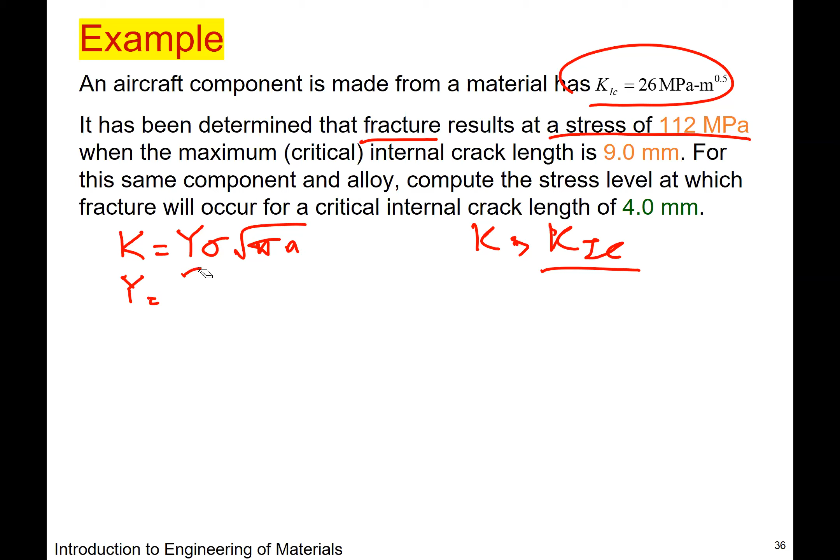So we can rearrange this equation to get Y. We know fast fracture occurs when the stress intensity factor is greater than K1C. So I've rearranged the equation to compute the geometric factor. Y equals K1C, which is 26 MPa, divided by the applied stress, which is 112, times the square root of pi times the internal crack length of 9.0 millimeters -- that's 9 times 10 to the negative 3 meters, divided by 2, because it's an internal crack. Computing that, we get Y of 1.95. That's the geometric factor for this internal crack.

Now, for the same component and alloy, we're asked: now that we know the geometric factor, compute the stress level at which fracture will occur for a critical internal crack length of 4 millimeters. Again, since it's an internal crack length, we divide the crack length A by 2. So now we need to figure out the stress level for this critical crack length: K1C divided by Y, where K1C is 26 MPa root meters, Y is the geometric factor we found, times pi times the new crack length of 4 times 10 to the negative 3 divided by 2 meters. That gives us the stress at which fracture will occur for this critical internal crack length of 4 millimeters: 168 megapascals.

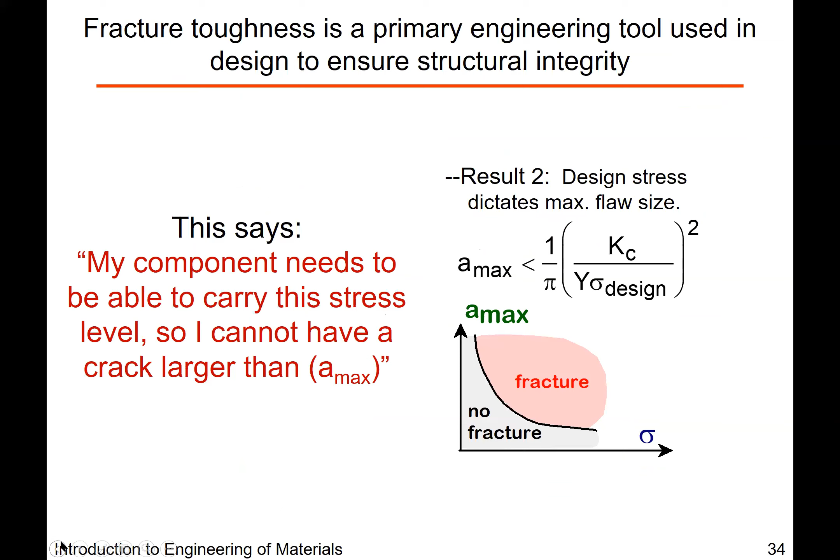What is the square root term in the numerator? Oh, that's the unit. Why do we substitute K1C for K? K is the stress intensity factor. Why do we substitute the plane strain fracture toughness for that? We know that the stress intensity factor can be computed based on the applied stress and the critical crack length. If it's greater than that, then the crack is not stable and fast fracture will happen. So that's what this question is asking: when does this occur? We can say that if we know what the fracture toughness is, when it's right at that critical crack length, then fast fracture will happen.

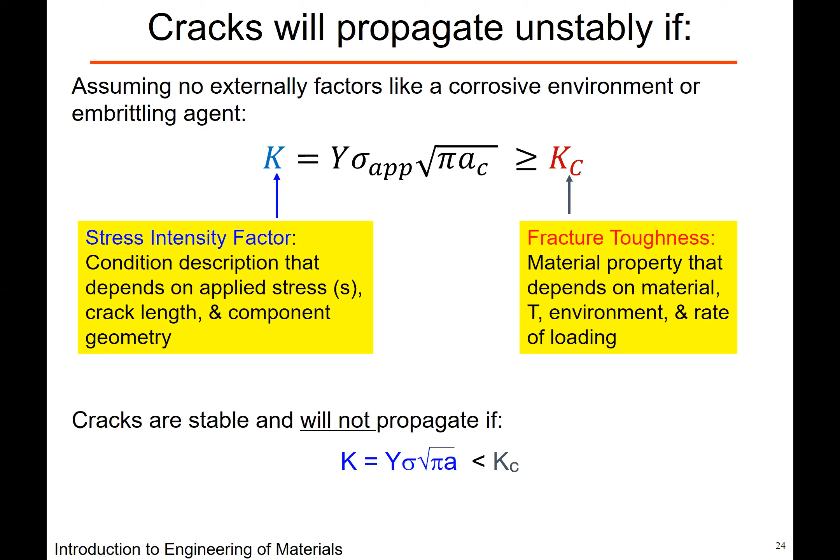Will content from the guest speaker lecture be on the final exam? Well, does that dictate if you're going to show up?

Given that, yes, it's on your syllabus, because the guest lecturer will be lecturing on content that has already been dictated and will be covered. So instead of my giving the lecture for that module, the guest lecturer will be giving that content. We've coordinated so the guest lecturer knows what should be covered. But the whole point of having a guest lecturer is that this person should add something beyond just the content you could read from a book, right?

Professor Glenn Bain has had 30 plus years in material science and engineering in academia, but he's also worked with a number of industry partners. He still works with them, and he's really been a leader in manufacturing. He'll speak to his collaborations with a number of automotive collaborators where they tackled materials design concepts based on the fundamentals you've learned here and maybe in some of your other classes. Who better to speak about the societal and environmental impact than someone who's been in this area for a really long time and can speak to the progression and evolution of how we do material science and engineering. So fundamentally still rigorous, but this person adds many years of experience.

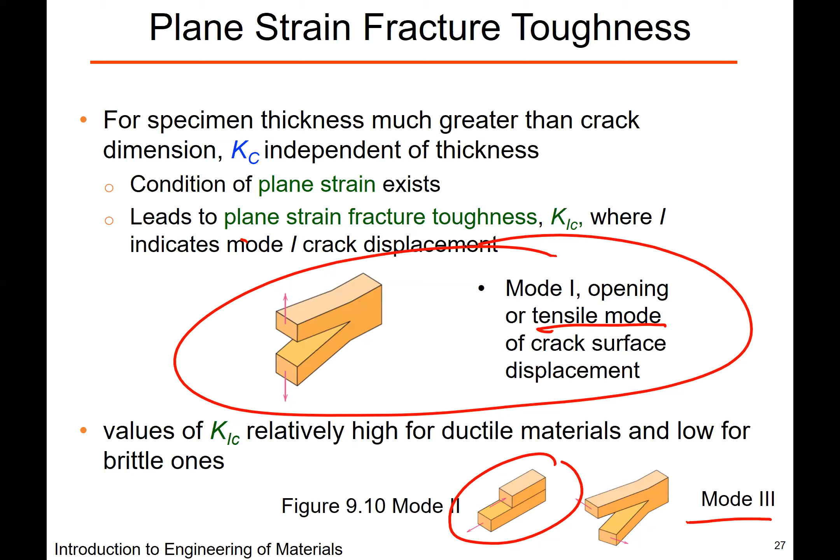So we are not concerned about mode 2 or 3 for this class. That is correct. All the examples have been on K1C, so we're ignoring 2 and 3 for this class. That means it won't be on an exam. I hope that is very clear and alleviates some stress and concern about that.

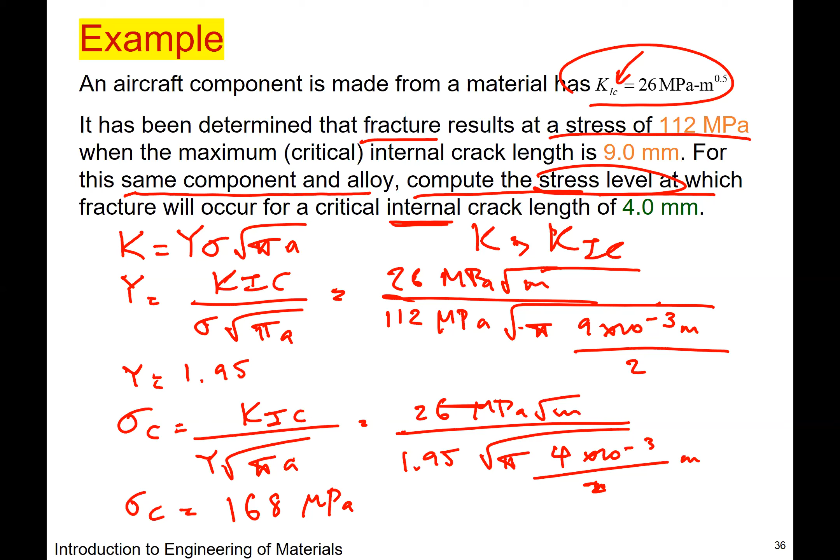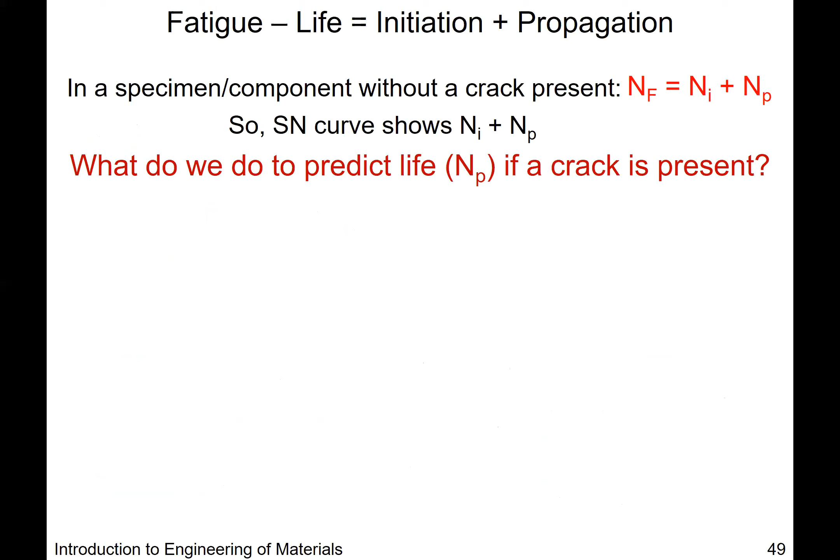So where we left off was on fatigue, actually. I skipped by this slide, mainly because there was a lot to talk about and not enough time last time before being interrupted midway through this thought.

When we were talking about fatigue life and how crack propagation happens, when you form a crack and it gets bigger and bigger, it's actually not a linear rate. Well, that depends - here it is linear, but in the beginning, if you look at the crack and fatigue life, dA over dN, the corrosion and fatigue folks know this inside out. There are three regions once you have initiation of crack formation and then propagation. We talked about the three regimes or stages in which this can happen. The takeaway message is this should be a huge concern for you as it gets near the fracture point - the crack propagation accelerates, and you can see the crack rate formation, dA over dN, versus the number of cycles accelerates quite a bit.

It's a real concern if you initially have a crack. We said before, cracks can be stable if they're of a certain size and you apply a certain load and it won't propagate, right? It's nowhere near the fracture toughness point, so it's fine - it's going to be stable. The material can still be used in service. It's fine. The story changes quite a bit.

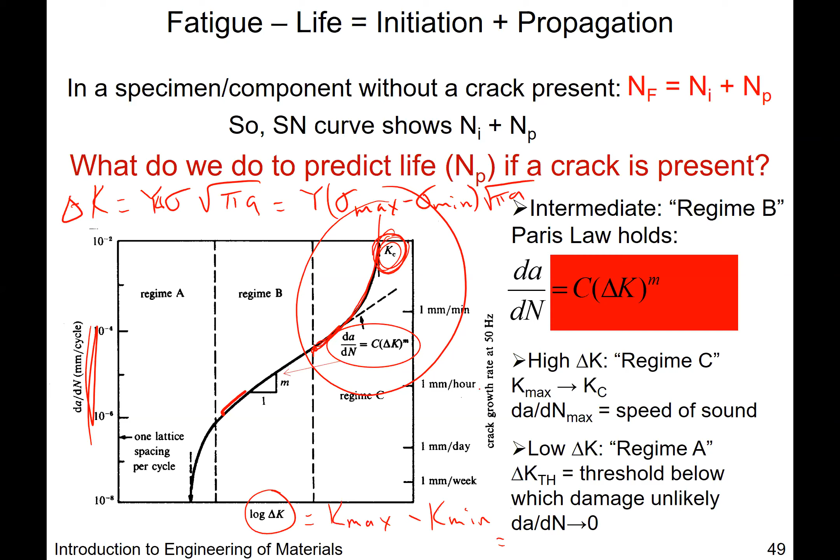Once you get into the real world and you are actually engineering materials where lives are at stake, this is something you really need to predict well and do safely. One of the other things I did not mention due to time is that when we're looking at fatigue life and fatigue life testing.

We're looking at the stress amplitude versus number of cycles to failure, so SN curves. When we talked about this, what I didn't talk about is the spread in the data. So when we're measuring the stress amplitude as a function of N, the cycles to failure, the data points spread out.

It means that if you have some high stress amplitude, the number of cycles to failure, you can compute more precisely. As N increases, since your error bar is larger, you cannot really say as definitively if it's going to fail after this number of cycles.

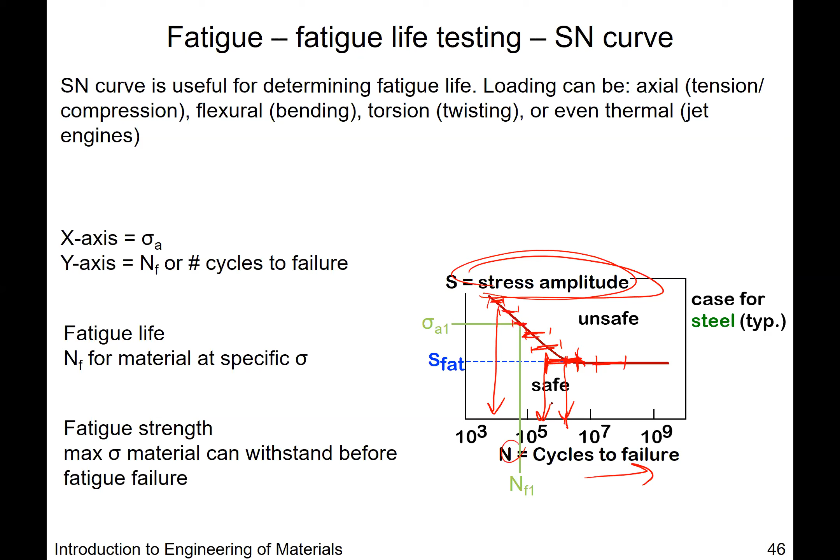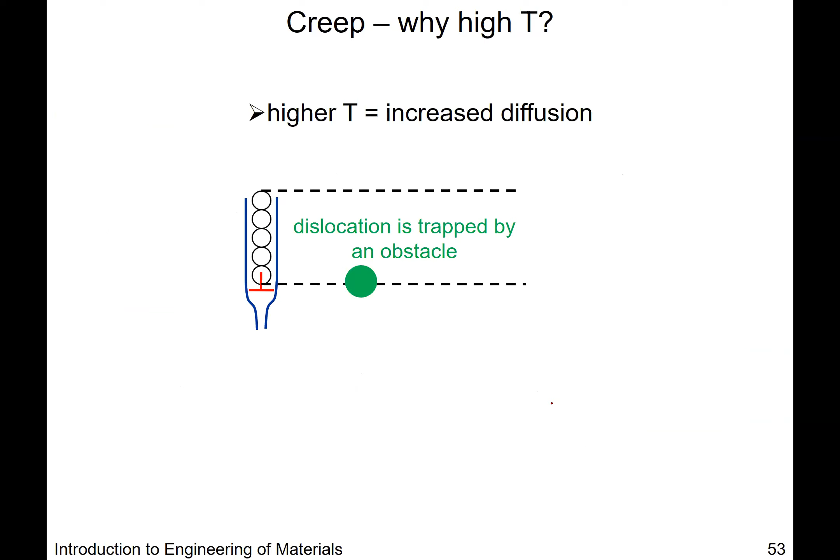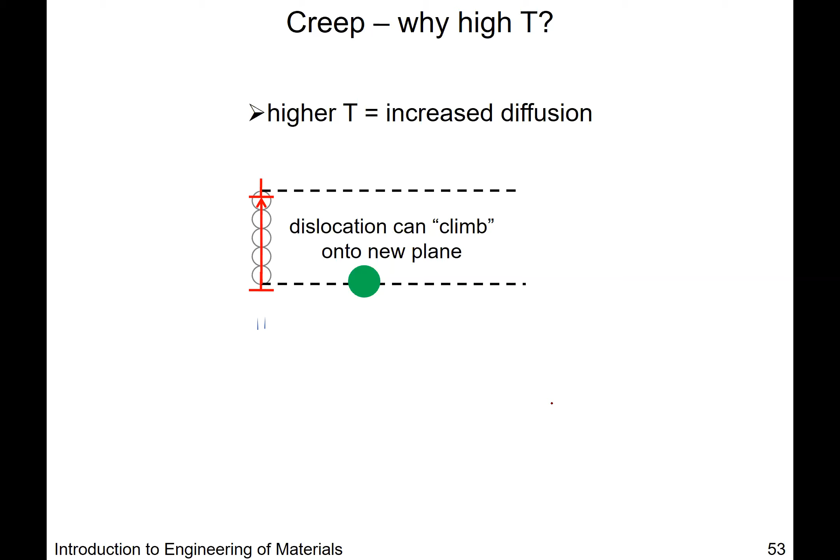Okay, so let's talk about creep. We talked about that. This is just a review on dislocation and how dislocation can travel and climb to different parts of the material.

I just wanted to wrap up creep with talking about safety prediction. So when we talk about a static applied load at elevated temperatures for some period of time T, we really want to know when is it safe, when is it not safe. That's ultimately the question we want to answer at the end of the day.

And creep is an Arrhenius type of process. As you recall, we've come across quite a number of these thermally activated processes, such as vacancy formation, excitation of electrons, for a number of systems. And so creep is no different.

So the strain rate, epsilon dot, is dependent and thermally activated. At 40% of the melting temperature or higher, you can imagine that creep can happen quite readily, and the strain rate increases as a function of temperature, as you increase your temperature.

And so what people have done is they've used this Larson-Miller parameter that takes into account all of these conditions: time to failure, what temperature you're at, the applied load, and so that's also assumed in this Larson parameter. When you recall, when we were calculating how many vacancies can form.

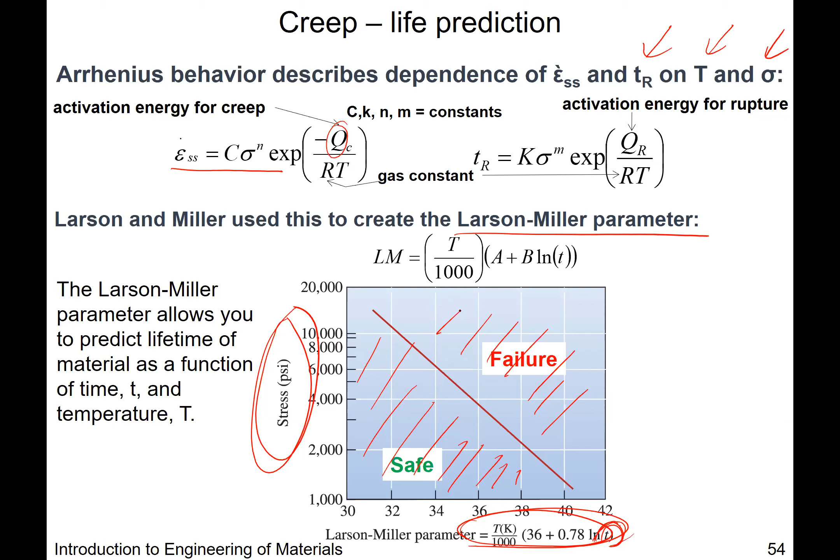Okay, so let's review before we move on to corrosion. So what is going to cause failure? When is a component going to most likely experience failure?

Well, you need to know the stress level, you need to know the fluctuation max min if it's cyclical, and also stress concentration due to the design or the flaws in your material. Of course, all materials have flaws. It's just how do we design a component in a way that we can still operate safely even when we have those flaws at a certain temperature.

So when we're thinking about fracture, we're taking into account the crack length and also when it grows. So is the applied load less than the tensile strength for ductile material? Is it lower than the yield strength for brittle materials, right?

And so there we talked about the fracture toughness, fatigue, cyclic crack growth. So when we apply a max and a min, in tension and in compression, how does that affect the number of cycles to failure, NF? How does that affect the crack propagation? Which stage is it in?

And then we also talked about creep where we applied a static load, but then we hold it over time. And so there we need to know some activation energy and also this materials dependent parameter. This obviously we won't be focusing on too much, but I thought I included in the summary for completeness. So are there any questions before I proceed on to corrosion?

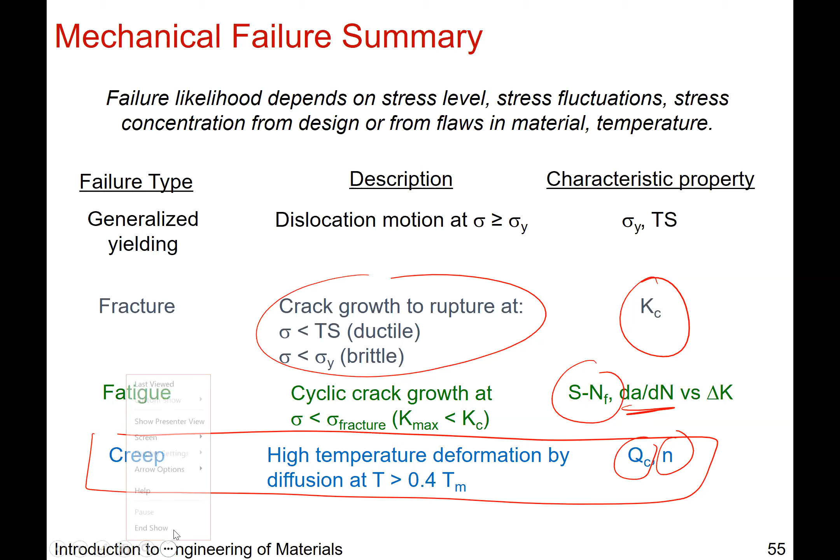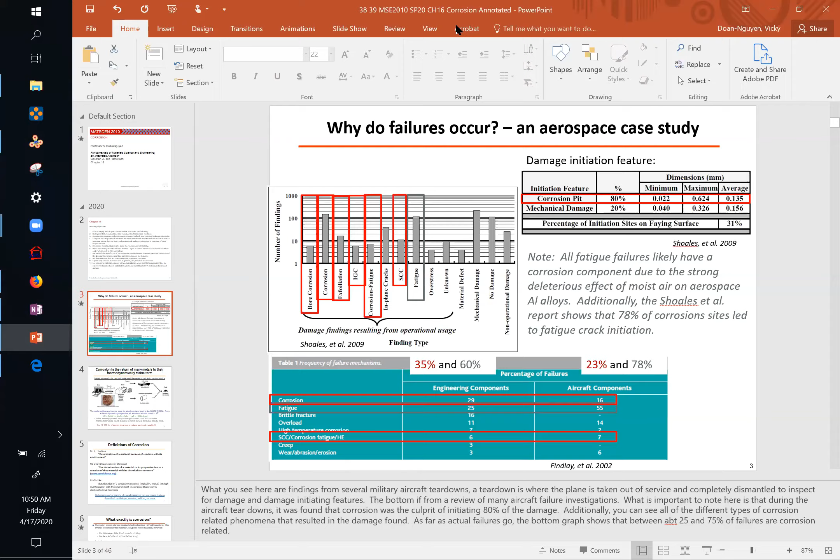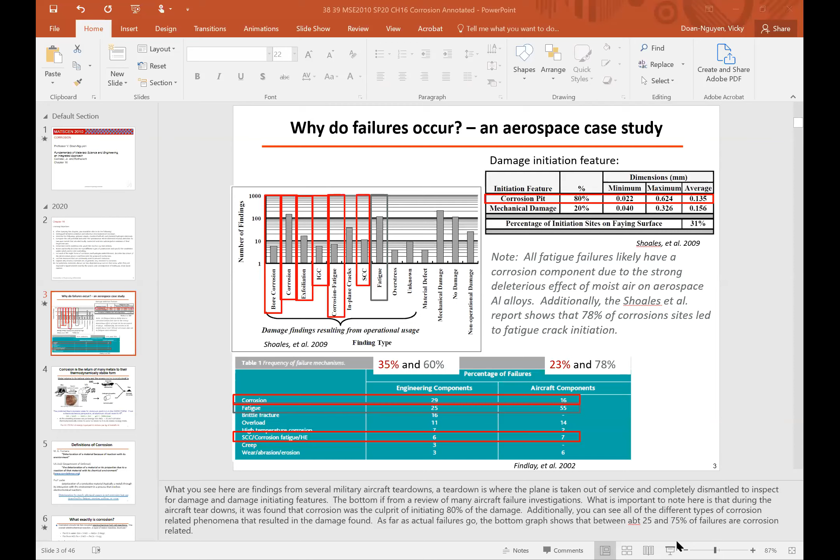Interesting. Let me exit out real fast. All right. Fascinating. Okay. Well, one moment, folks, while I figure out why this has decided to cut off parts of the screen. Let me stop sharing and reshare again. Okay, that's much better. Let me switch over to this side because the camera is being wonky.

That's okay. All right, so slightly different angle, but the video will continue. Okay. Right, so corrosion, the last module from me. There we go, this is better. Okay. Sorry, everybody. Right, so the last module from me. We're going to bring it all home and talk about how corrosion ties into failure analysis and fatigue.

So after this chapter, you'll be able to master some key terminologies, which is oxidation and reduction. You may have heard this already in your general chemistry course. So we'll review what reduction and oxidation means in electrochemical reactions. We'll also talk about galvanic couple, standard half cell, the standard hydrogen electrode. We'll talk about cell potentials and also what happens when you have two pure metals in solution together. And then we'll also talk about the rates at which oxidation and reduction happens.

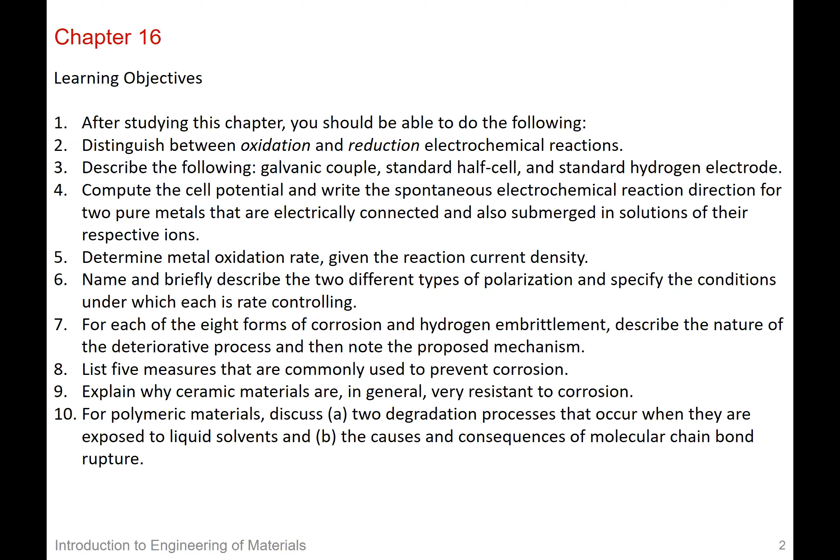We'll also talk about corrosion in the sense of environmental assisted corrosion. So what happens when your material is in some corrosive environment, like in acid, HCl, or in seawater, things like that. All right, and we'll also talk about polymeric corrosion, although that's not really a thing in the sense that you need movement of electrons, and so polymers can degrade, but in terms of the definition of corrosion and how you need to move electrons around, that's more prevalent, obviously, in metals, right? But you can have degradation in polymers. And there is some wear, even though polymers are more corrosion resistant.

Okay, so why do we even care about corrosion? You can imagine that it's a huge billion-dollar industry to prevent corrosion. And you can see this especially in Ohio, where we have winters, right? We have to salt our driveway, we have to salt the street, and that could assist with corrosion of metal parts in your vehicle. It can also cause major issues in aircraft.

And so here on this slide, you see data tables that talk about how failure has happened in planes, right? So this comes from a decade study from Shoales and coworkers. This is 2009. That means 10 years before that, they've looked at airplane parts and also aerospace components, and they looked at what was the original reason for failure in a material, and you can see here they've summarized it as 80% of the initiation feature was due to corrosion pitting.

Okay, and so we'll talk about what is that versus like uniform corrosion. But it's a huge problem. So if you understand corrosion, you can prevent potentially or catch these issues before they happen.

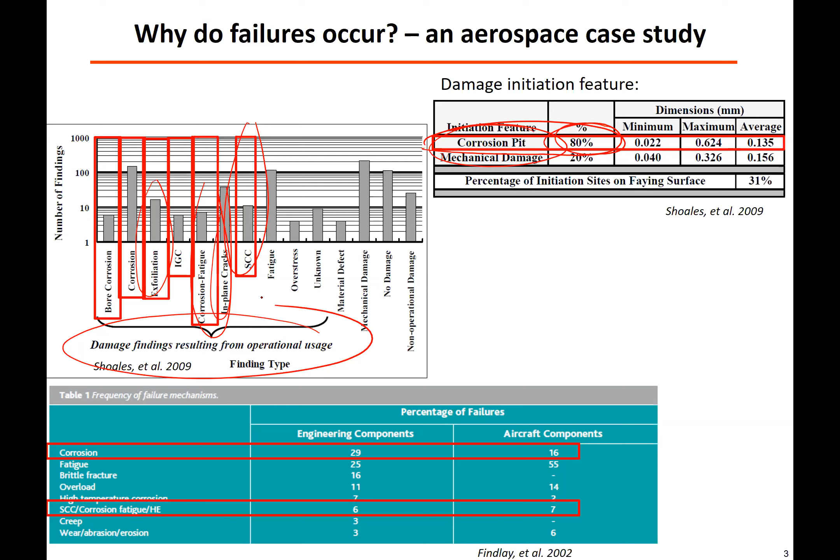So what we're really talking about when we talk about corrosion is we need to break it down into both the thermodynamic part and the kinetics part. When you have a metal and you're mining it out of the ground, you're most likely not going to find a piece of aluminum, a sheet of aluminum foil, or a huge piece of iron. Usually it's in an oxide form, which metallurgically you need to convert. So let's say from iron oxide, through refining, casting, rolling, shaping, all of that, you get out the parts you want in metallic form.

Same thing for aluminum - typically you find it as aluminum oxide. Lithium in lithium ion batteries, you don't just find lithium in ores, you find it typically as lithium hydroxide or lithium carbonate, and then you have to convert that into a metal. So when you buy lithium metal chips or lithium foil from the vendor, it has been converted from the ore. So all that means is we're fighting against thermodynamics.

Typically, when you use aluminum like this, it really wants to oxidize. If you look at the Gibbs free energy, which we talked about when we discussed imperfections, delta G equals delta H minus T delta S. So there's an entropy term and an enthalpic term. The takeaway is, if the Gibbs free energy is negative, that's telling us it's most likely going to happen.

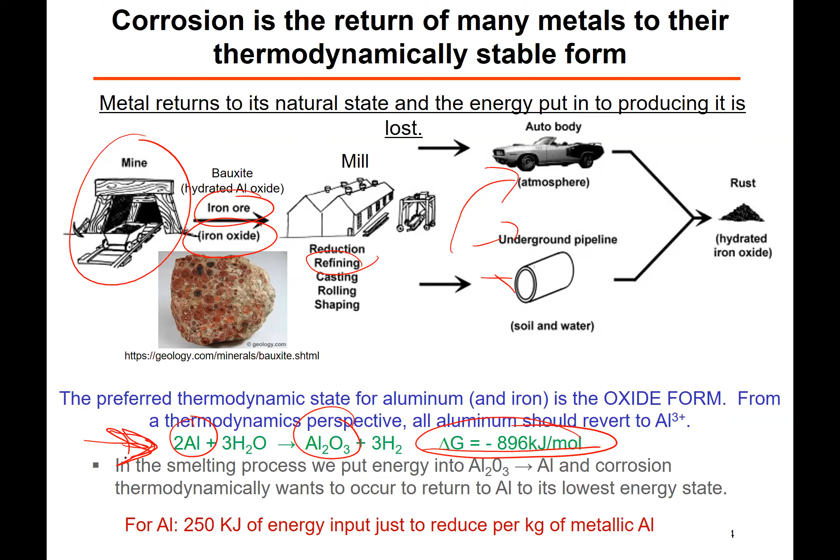But on top of that, now you have to consider fighting corrosion in the Ohio winters. All right, so let's also define what corrosion is. Before, I was starting to go into the details of what corrosion is. Polymers don't undergo corrosion if they're not transporting electrons.

If you've taken the new bus shuttle within the last year or so, one of the stops is Fontana Labs, named after Mars Fontana. Mars Fontana did decades worth of fundamental research on corrosion, and he has defined it as deterioration of a material because of reaction with its environment.

Then the Department of Defense, the Undersecretary of Defense, has defined corrosion as the deterioration of a material or its properties due to a reaction of that material with its chemical environment. Now we're talking about not just deterioration - because you can have deterioration, but what kind of environment? Are you just applying pressure? What is it? So now there's an extension - we have to take into account the chemical environment. Is it an acid? How corrosive, how acidic is this environment, that sort of thing.

And then of course, there are other professors at Ohio State Materials, such as Professor Gary Frankel. Here I've taken an excerpt from Professor Locke, where she describes corrosion as deterioration of a conductive material, typically a metal, through its interaction with the environment - keeping with the defense definition - in a process that involves electrochemical reactions. So by this definition, polymers would not corrode because they wouldn't undergo these electrochemical reactions, and they're not conductive.

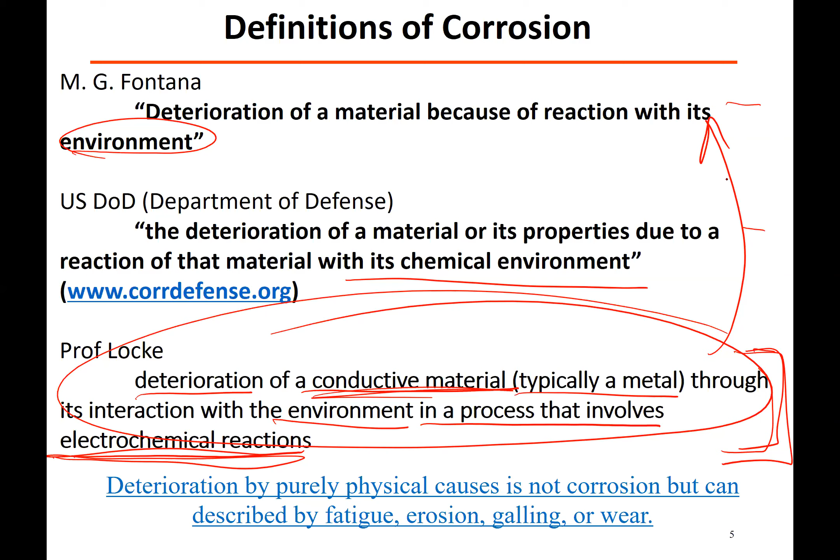So what are the mechanisms involved in corrosion? Corrosion occurs via two coupled electrochemical half reactions. How are they coupled? They have to be coupled electronically - there has to be a pathway for the electrons to travel - and they also have to be coupled ionically, meaning they have to be in the same solution. They can't be isolated from one another.

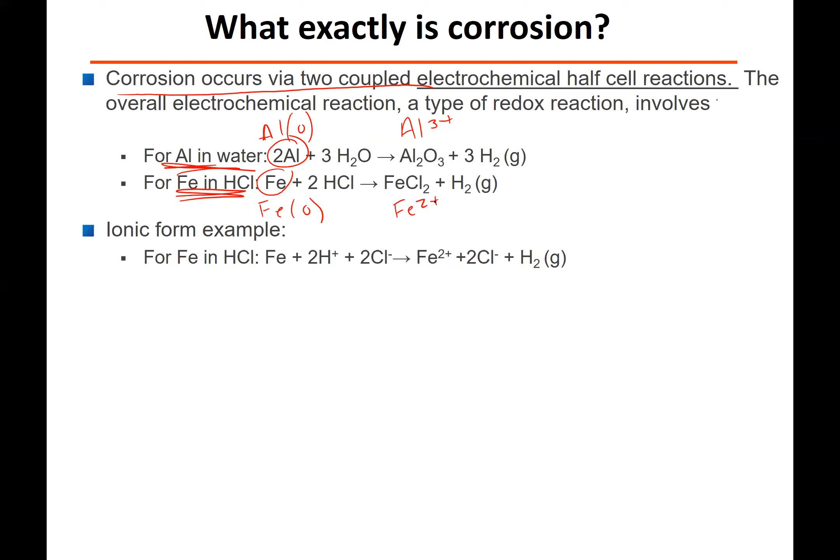A typical electrochemical reaction is a type of redox, reduction-oxidation reaction, that involves, for example, these two reactions: aluminum in water, and iron in acid. The aluminum here becomes oxidized, so that's the anodic reaction. Here's another example where iron goes from iron 0 - the metal is always 0 valent, it doesn't have an oxidation state - to aluminum 3+, or iron 2+ in this case, because chloride is 1-, so Cl2 makes it 2-, and so iron is 2+.

What you see here is there's an evolution of hydrogen. So what's happening is hydrogen in H2O is plus, and that's going to H, 0 valent hydrogen in H2. So really what's happening when we write this out is that iron plus 2H plus 2Cl- goes to this - if we had to write out the ionic form of all the charges and oxidation states, this is what it would look like. But obviously, what we really write is this final equation.

Going back to these two examples, we define the anodic reaction where oxidation is happening: iron going from 0 to 2+, aluminum going from 0 to 3+. Then the cathodic reaction is where you have the reduction of H+ with 1 electron going to H0.

So if we have this overall reaction, the anodic reaction is just Al going to Al3+, very similar. This would be the anodic reaction: Al going to Al3+ plus 3 electrons, because what you need is charge balance. Where do these 3 electrons go? Let's put them here for now. So, very similar to before, instead of 2+ you now have 3+.

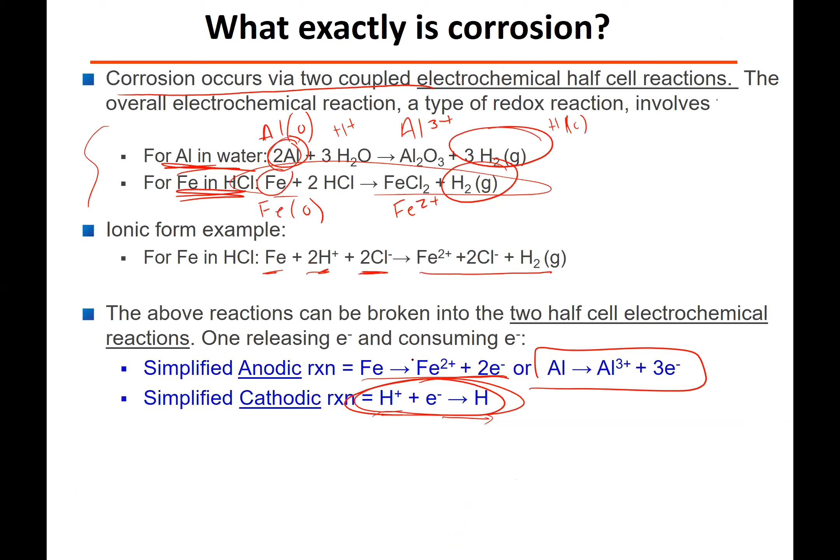So then what's really happening at this interface? Let's say here you have this metal, the electron conductor, sitting in some electrolyte - in this example, it's just sitting in H2O. How we treat this molecule is actually as H+ and OH-. So what's happening during the electrochemical reduction-oxidation is aluminum becomes Al3+, and that Al3+ is then going into the electrolyte. The electrolyte is typically some salt in a solvent, but here we don't have any salt, we just have water as the solvent.

What's happening here is when that happens, the H pluses end up interacting - they're everywhere in the electrolyte, but the ones at the interface will see other H pluses and react to form H2, which will evolve as a gas. And the Al3+ goes into solution - it actually dissolves, this ion dissolves in the electrolyte. So that's one part.

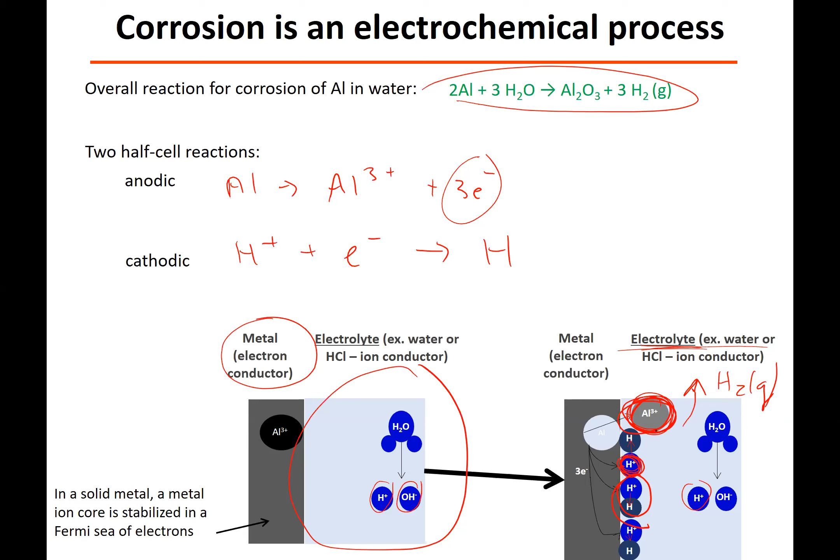What happens when you have two dissimilar materials, let's say iron and aluminum, or aluminum and magnesium? Then you have two pieces of metal and they have to be connected electrically. There needs to be a conductive pathway between the two of them, and the ions have to flow, as I mentioned. So the electrolyte needs to allow for ion flow. If those four things are met, then you can have a corrosion cell.

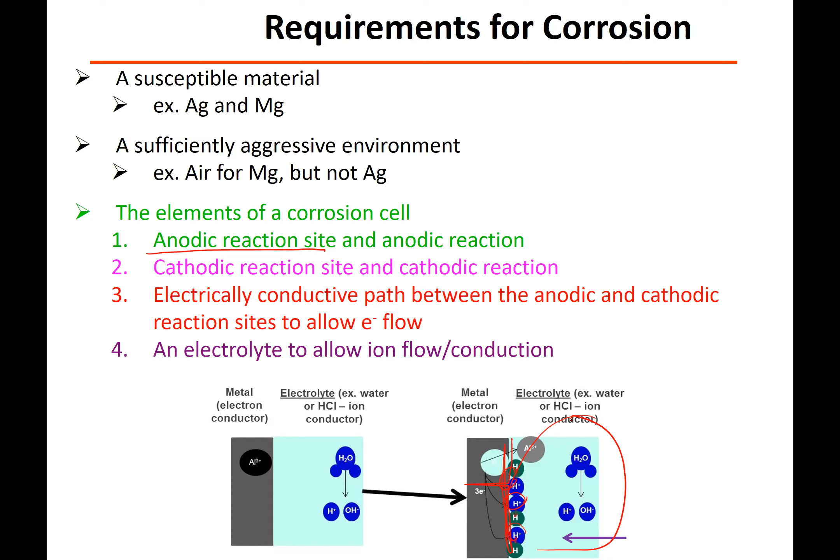So what causes corrosion? Well, real materials cause corrosion by the sheer fact that they're imperfect. All materials are going to be imperfect in some way. Even when you make the most beautiful single crystal silicon, out of the Czochralski method, which is something I bring up a lot because that's heavily used in industry - even if you make the most perfect single crystal, we've calculated the number of vacancies in this perfect single crystal. And even though you try to prevent all of these things, most materials are not the beautiful single crystal of silicon. I mean, they're usually polycrystalline, or formed into some way, or you introduce defects to strengthen the material.

So what typically happens in real materials, if it's polycrystalline, you're going to have grain boundaries, and these contribute a lot to corrosion because corrosion can happen right at the grain boundary. That can be your cathodic site, that can be your anodic site, and then your cathodic site can be just in the grain itself. So that can happen just from the sheer fact that you have a polycrystalline material.

If there are vacancies, if there are those defects, if you have adsorbed ions from solution because you cleaned it in a certain way, or heat treated it in some gas, maybe there's some adsorbed elements on there - this is a huge problem with embrittlement. If you have hydrogen or nitrogen around, that can adsorb and then start to diffuse into the material, and that can cause, well, one, fatigue and corrosion. There can also just be dislocations - we talked about screw dislocations. So basically, any impurity is going to wreak havoc on your system and allow for corrosion to happen.

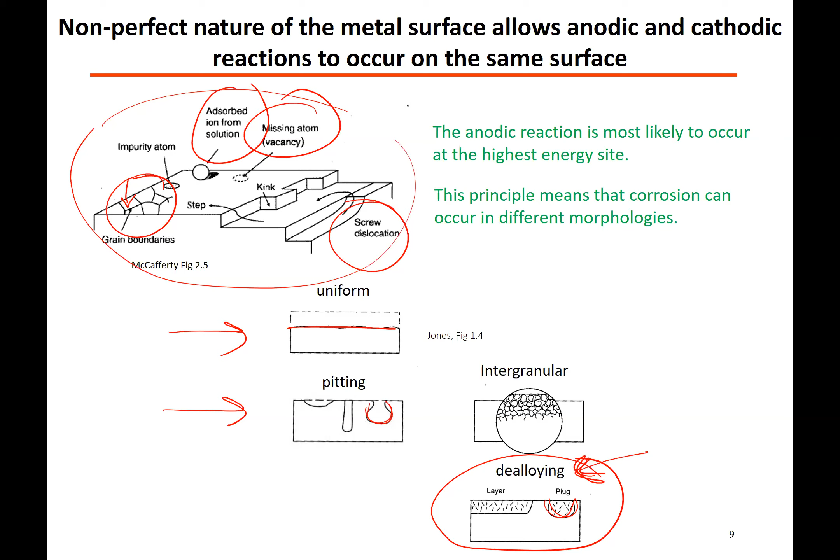At the beginning of the lecture, you were saying some stuff about the grades that I missed. Can you go over that again real quick? Okay, so the question was something about grades, can you go over that? And the answer is yes.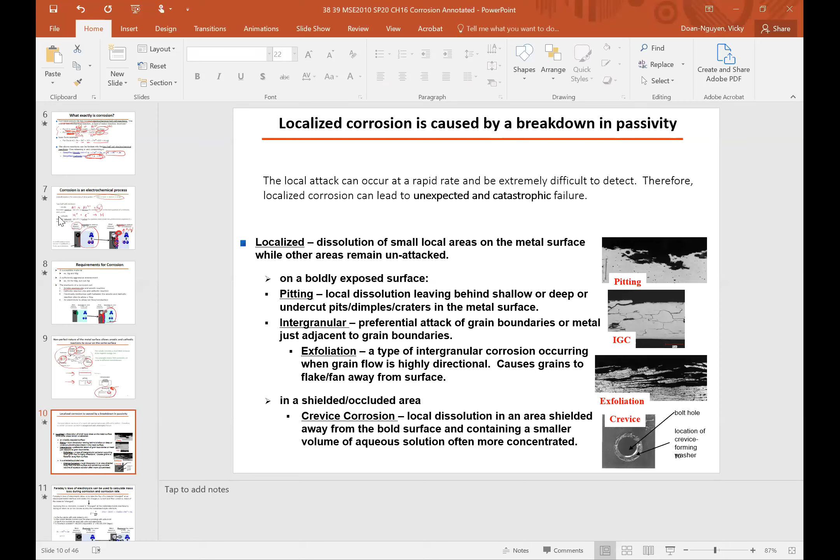And the lowest homework grade should already be dropped in Carmen. So when you put in all your hypothetical homework grades, it should drop the lowest score and compute your homework percentage out of 35%. Does that clarify your question?

So we did change the grading scheme for exams in the sense that the extra 5% - exam 1 is 20%, exam 2 is 20%, exam 3 is 25%. And so to reduce the high stakes of the cumulative final exam 3 being weighted the most at 25%, we've given you the option, although it's automatic, to shift your 25% to weigh exam 1 or exam 2 if exam 3 is not your highest grade. Okay cool, so we can just pick which one of the three gets the 25% weight.